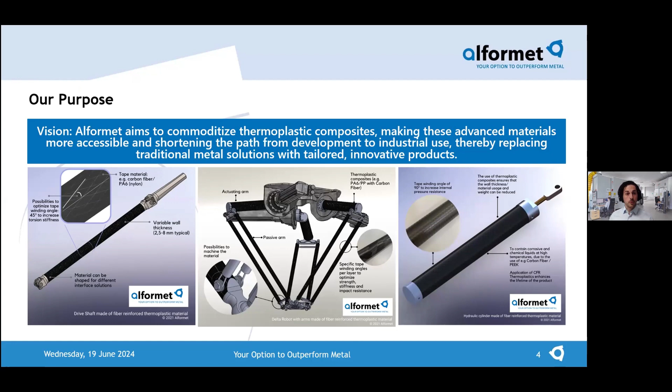As Thomas mentioned, what Alformet is there for is to lower the bar of entry for thermoplastic composite tubular products. So we want to commoditize these materials to make them more accessible, shorten the path from development, and then replace traditional solutions. Alformet stands for Alternative for Metal. This is something we do with our business model. Alformet was designed from the ground up as a company who uses the machines from AFPT, and everything about our business, from our inventory, our supplier relationships, our process flows, our ERP system, our company culture, is designed around the production of these thermoplastic components. So when someone comes in with something they want to have, then we help them design it, they order it, we manufacture it and deliver it.

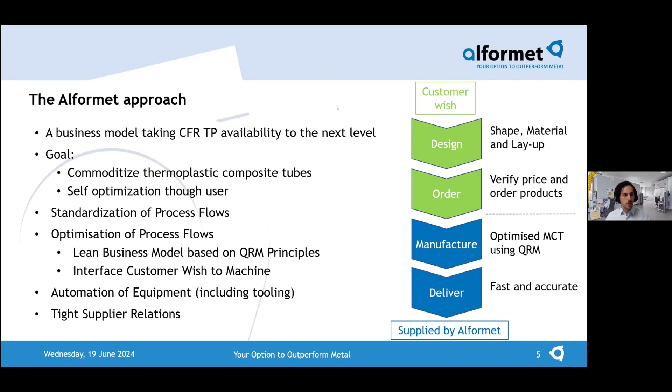There's two sides of that business. For one side, there's the series production. That's when someone has a family of products that they always order the product numbers from us. And then there's the one-off production, and that's going to be our focus today. The one-off production is high mix, low volume production. That's when every product is different and the products probably aren't going to be repeated. And our goal here is to optimize this top part of the process flow.

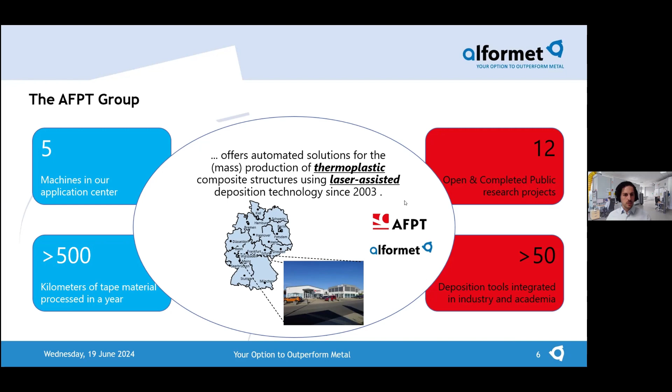So shortly about us, we're part of the AFPT group. And being so, as I've already mentioned, we use AFPT's machines and technologies. AFPT has been focused on thermoplastic production with a laser since 2003, so now over 20 years. We have 5 machines at our facility here at Alformet that allow us to process around about 500 kilometers of tape a year, and stay closely connected to AFPT and the current availabilities of functions on their machinery.

For those who don't know, really short, the laser-assisted tape winding process is a process that uses a laser as a heat source to melt the tape, both the incoming tape and the already laid substrate, in such a way that it's a closed loop control. It's melted completely when it gets to the nip point. Then when the roller goes over it, it's a fully consolidated composite. There's no need for any sort of post-processing. There's no need for harsh chemicals. There's no off-gassing. It happens in situ. It's quick, it's efficient, and allows for a scalable, high-quality production.

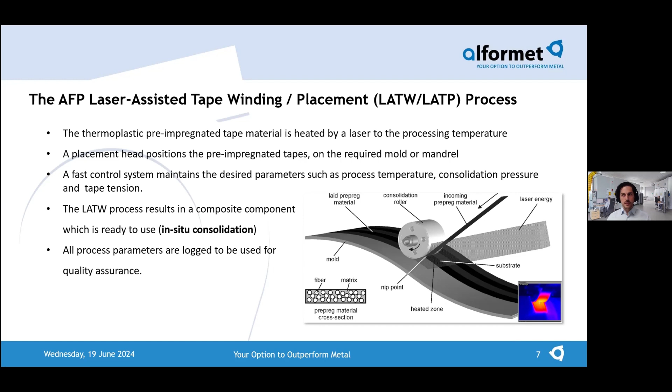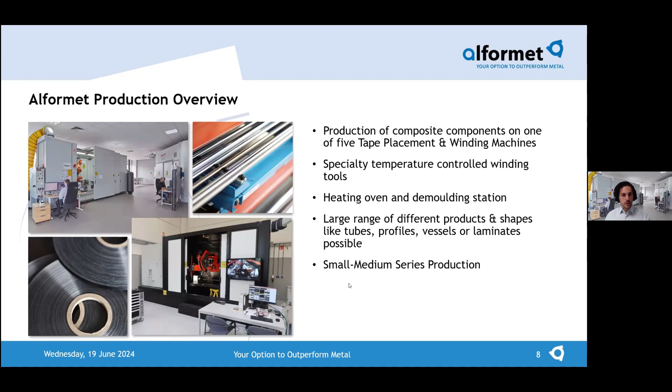At our facility, we have our machines. We have specialty temperature-controlled winding and placement equipment. We have several ovens and demolding stations, ranges of products that we could do. I'd be happy to let someone know more when they want to know, and we can achieve small to medium series size production at our facility currently.

Primary product focus is thin-walled inserts, thick-walled structures, pressure vessels, and functionalized tubes. Those are the four categories I like to separate them on. The thin-walled inserts are things like rotor sleeves, localized reinforced inserts for injection molding processes, preforms for other post-forming processes. And then on the other side, we have the thick-walled structures, which are for rocket structures, for seals, for bearings. Those are our two bread and butter businesses.

They're complete polar opposites. The one side is very high automation and low production times. On the other side is very long production times and very low automation. The pressure vessel is something I'm not going to focus on right now, but that's also a very hot topic with the hydrogen economy.

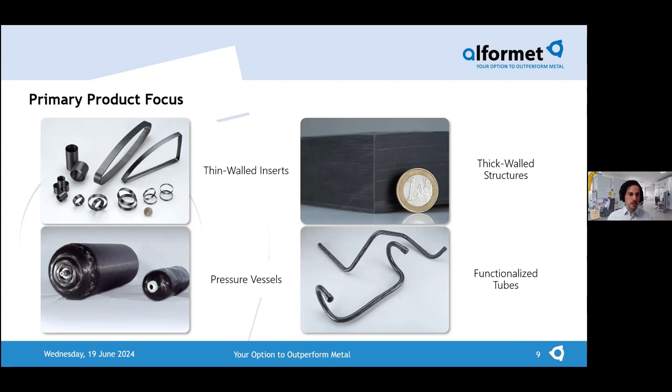And functionalized tubes is also a very exciting topic, but not the focus of what we have here. That's taking advantage of the full abilities of thermoplastic composites, being able to reform them, to bend them, to overmold them, and functionalize them into integration to other structures. The focus today is going to be specifically tubes, standard tubes that are straight, that have a defined laminate structure, that are tailored to the needs, and are made in the volumes and sizes that are necessary.

In production planning, we have our own internal system and software that we programmed and use ourselves. That way, when we get an order, we are able to, with very few variables, give those into our system, which has the intelligence of what we know about how the different materials function in different conditions, being different diameters or angles of the mandrels, and then the different tooling that we have with the different abilities that they have.

That on top with knowing our machines, knowing the geometry of our machines, and knowing the control system of our machines, by putting in a few variables, the software that we have automatically prepares a production for us. That automatically gives us the robot programs to be put on the machines. That gives us the production documentation and allows, with very few clicks and basic information, to set up a production so it could either go directly to the machine or go to an operator to be entered into a machine.

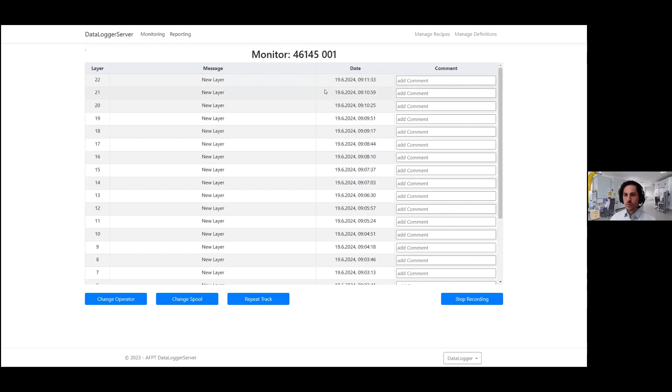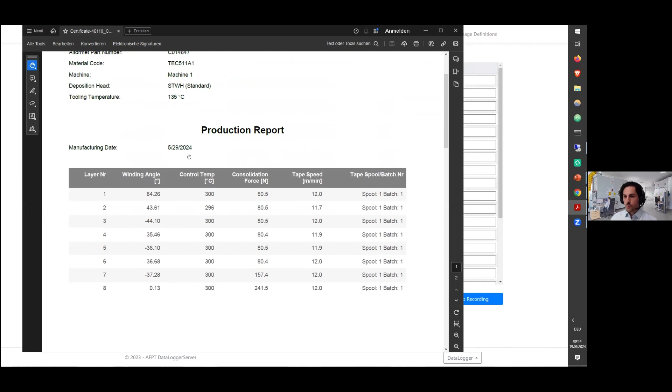And then after the production, you generate such a certificate to show the customer exactly what happened on every layer, with what angles, what temperature, what speed, what force, and then a statement of compliance for the limits that we use to check this, plus then standard information to your order.

So switching back to the presentation, Thomas, let me know if something didn't work on the switch. Yes, that's what we have.

And so that's on what happens during the process. That's what happens after the part is produced. Then you get a certificate out of the production. And then, of course, there's the post-production. We could use also the data from the machines to do preparation for post-processing of machining, or anything to improve the product in a certain way, either with surface or something specifically for finishings. And then there's also the diagnostics.

So during the process, everything is recorded, everything is logged, everything is saved, and that could be used for very intense diagnostics, such as what we use with the partner in our joint venture, Digital Composite Factory. The company New Frontier Technologies could, for example, use these diagnostics post-process to feed back into the machine and improve the quality of the product as we go along.

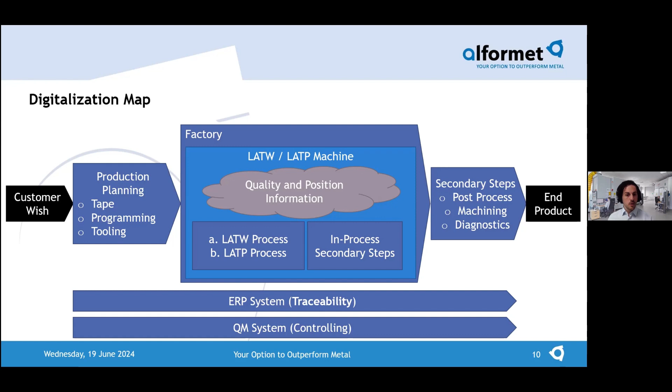So, as mentioned a couple of times, the point of today is making the start of the process easier, reducing the time from, hey, that sounds like something interesting I want to try, to here's something on my table that I could get an impression of, or at least test it directly. I decided to present that in a flow.

When a typical sales order comes in, or a request for a product, there's a couple steps that need to happen. So even just between this first interface between customer and the engineer, a request comes in per email. Someone says, I'm interested. I would like to learn more. And I'll say, okay, thank you for writing to us. I would love to talk to you. Let's set up a meeting next week.

No, next week's not good. Let's try for the week after. Okay, we'll do the week after. Good. Then we have a meeting. We discuss the necessities of your applications. We discuss the design criteria for the process, talk a little bit about what needs to be considered. And then they say, great, I would like a quotation. Good. Then it comes into the pile of quotations that need to be processed. Might take some time depending on how capacities are.

Then after that, a quotation is sent. And then the questions start coming: oh, what if we change this? I want one more of those. I want an additional layer. What happens if we change the angle? Yes, good. Okay, recalculate. Here's the additional quotation. Good, then it needs to go into our processing, get ordered. Good, it's ordered. Goes to the machines, gets sent. Maybe from start to finish, 4 months go by before the first product is on the table and we have a way to talk about it. And then what happens in between as well.

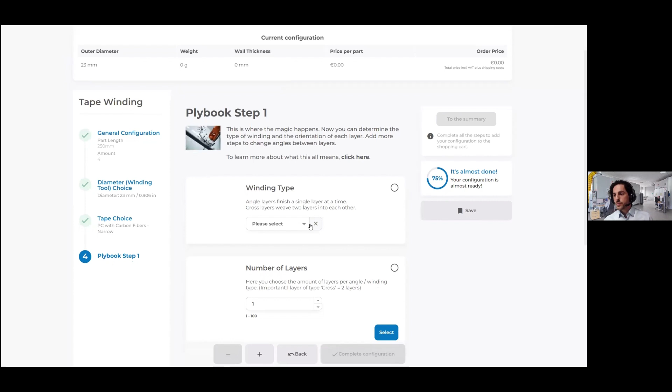In our process, there's two basic winding types. We call them angle winding and cross winding. There's a short explanation here, and there's documentation that's not finished. That's why the link's not there, but it's being prepared, where then here's the link, and you could find out more information about what it means to choose one or the other. There's quality considerations, there's costing considerations, there's productivity considerations, things that'll be explained to you. That way you can then make the decision yourself.

Here I'll say I want to have one angle layer of 89 degrees. And what that does is it shows me directly the effective layer that comes out of the process. That gets back to another important thing that someone needs to know about thermoplastic tape winding. We lay the tapes over a mandrel in such a way that a layer is completely closed. That means depending on the diameter of the tube and on the width of the tape, there's only certain angles that are possible. Not every single angle is possible. And here you could see the effective angle that comes out of the process based on the desired angle that you would like to have.

So I just define one layer. As you see, the price starts forming. It seems quite expensive for one layer, but here is where you can see how much of the price is going into the basics and the setup and the secondary time, how much price is for the part, how much price is the material. These are things that we could play with here, because it all updates live at the top of the page with the information about the diameter, the weight, the thickness, then the price per part and the total order price based on the number of parts that we've selected.

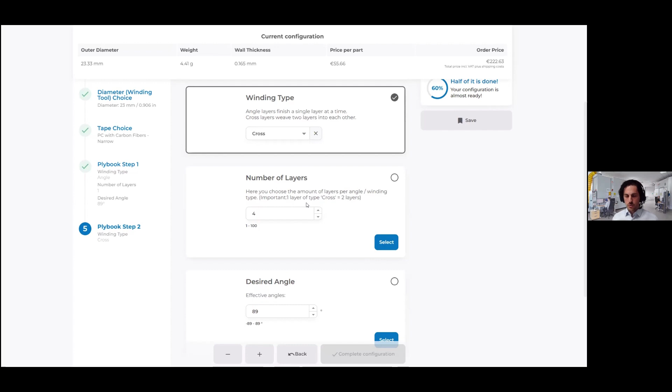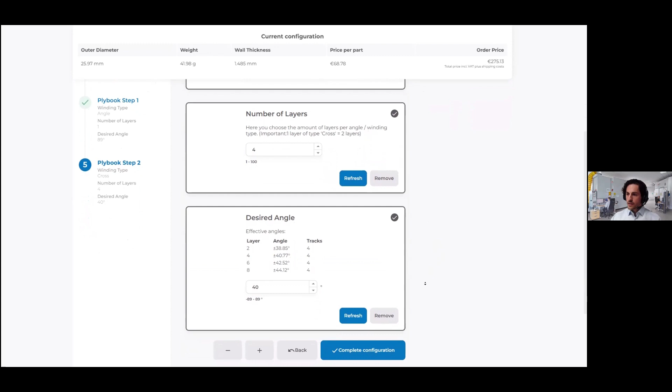So going through this process, I would like to have some cross layers, I'll say four layers here. Here I note that cross layers are always a combination of two layers, because cross layers weave two layers into one. So four layers in this case means eight layers below. Four cross layers means eight layers, and I would like to have that with 40 degrees. I select that, and I see the actual angles that come out of the process again. So this can be played with back and forth. We could watch the price update, and we could also see how we optimize.

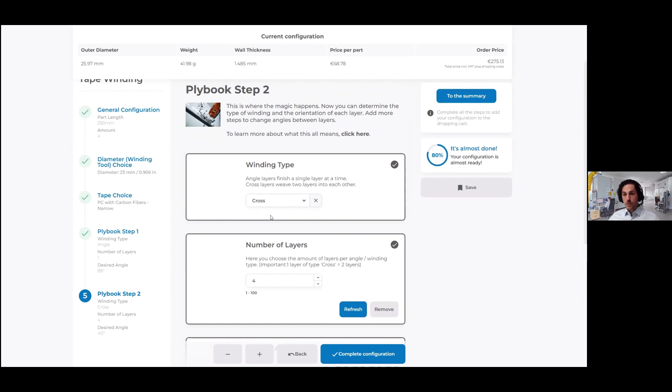So if I want to get more out of a production, because when the part is much shorter than the mandrel, the more parts that fit on the mandrel, the more the price comes down. So I can click right back and change this to 8 parts, refresh. The price per part was 68, and I put in 8, and it comes down to 43, and so forth. And the same if I lower the length per part, then obviously the price per part goes down. If I increase it to a certain point, it might tell me that doesn't fit on the mandrel. Those things also come into play.

I could say, no, I want 1.5 meters, and it starts updating. Now it gets much more expensive, because there's fewer parts that could fit on the mandrel per winding. That's why the price per part shot up at this point. So we'll go back to that. And I could also show you how the different diameters affect this mix here. So you could choose a larger diameter. I'll go for 110.

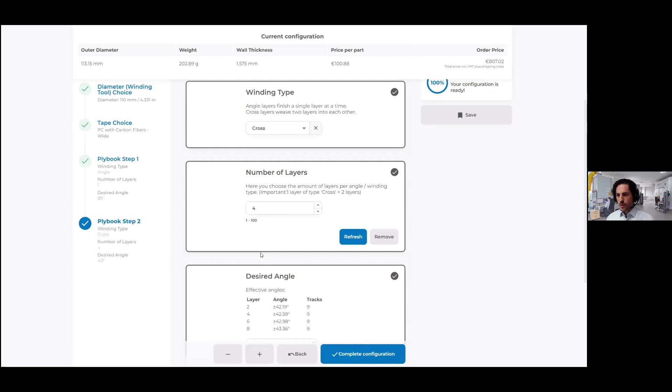And then we could see here the wide tapes and the narrow tapes are both available. So here's a narrow tape. It's 109 per part. I choose a wide tape in this scenario. It's a little bit more cost effective. How much the tape and the width of the tape actually impact the final price of the part is once again very dependent on how many layers we're actually putting into this part. And here you could continue adding steps as far as you want to go. I could add another step for another 15 layers of angle winding, and it goes on, going back and forth to design exactly what it is that you want to have in your part.

And this is this constant feedback, which has always been missing for the potential consumers of this technology, where they need to be discussing with someone who is an expert on this, who can both advise on the financial aspects of it, as well as advise on the engineering aspects of it.

And this technology itself, so thermoplastic composites themselves aren't widely used. The technology of laser-assisted tape winding is also relatively young. There isn't a general understanding in the zeitgeist of the market how exactly this works. And that's what we want to provide. We want to provide a way that not only provides easy access to this material, but also education on how it works, why it works, and how you best optimize it for yourself, your application, and your company.

And obviously, these are not volume prices. These are not going to be something that you could expect for 1,000, 100,000 parts. It's not even possible to order here. We're talking in the range of maximum 50 parts currently.

And what that means is that also the tape prices and the tape availability, these are also not the most optimum prices, but it allows an easy way to get access to it, to try it out, to validate for the application, and more quickly, when it comes to it, move to a state where you could be ready to either order more variants and try different things out, or get closer and closer to that series application where you could then be ordering in large volumes, have the potential, have the prices. This is shortening the loop, closing the circle, making all of our lives easier.

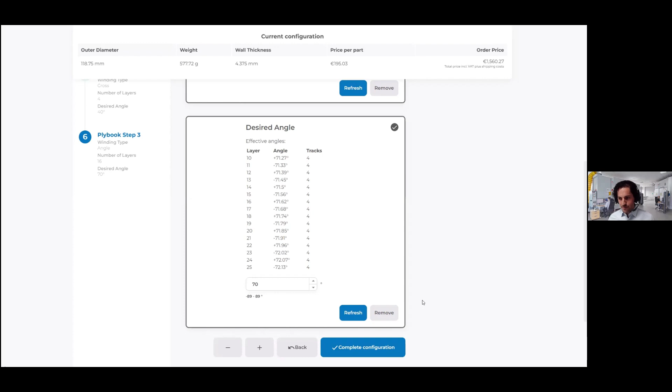So obviously then when it's finished, click on complete configuration. You see a short summary of what your price per order is, everything you've chosen here. Go to your summary, you put it in the cart, you go to checkout, you order it, you have it in a few short weeks.

So for me, that is the core of what I want to get to here. I wanted to show you who we are as a company, what we do, where our core capacities are, and where our value is. Our value is we have an incredible amount of knowledge. We have quite an amount of capacity on our machines.

We have very good relationships to suppliers of not only the mandrels, but also the tapes that we have, a consistent stock that's been built over time, as well as channels to quickly acquire more things that are necessary to more quickly get you what you need to try it out and get something on the table to feel it, say, okay, that's what it looks like. That's what it feels like. That's how it's going to work in my application.

The next step of that is then the digitalization. We have now the potential to give the configuration abilities directly into the hands of the customer. There's obviously those buttons to reach out to us if something's not clear or something needs to be explained in more detail. And there's also, for example, a save button on the page where you get an email link of the thing that you have configured. You could then forward that link directly to us and say, hey, I'm having problems. Can you help me? We could adjust it for you and then send a link back for you to proof it, order it, and move forward.

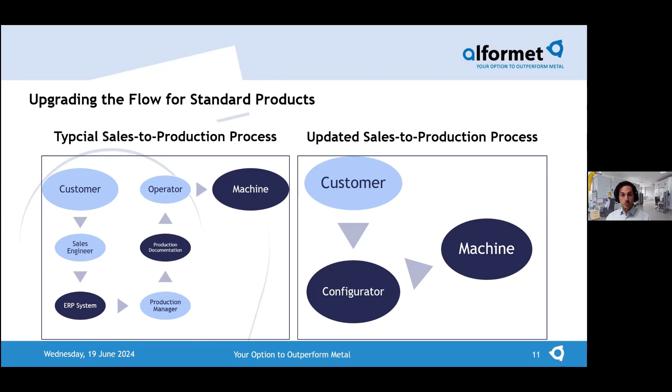I hope you've enjoyed this presentation itself. I hope you use our system when it goes live. Like I said, stay tuned and look out for it. And honestly, I would like to then do less talking, open the floor for more questions, and discuss any feelings you may have, as well as give you the potential to help form the future with us. When you have input, let us know. When you see that information is missing, or something seems unclear, say something. Obviously, we do this every day, so it's easy for us to overlook something. Reach out to me, let me know. I'd be happy to implement your opinions.

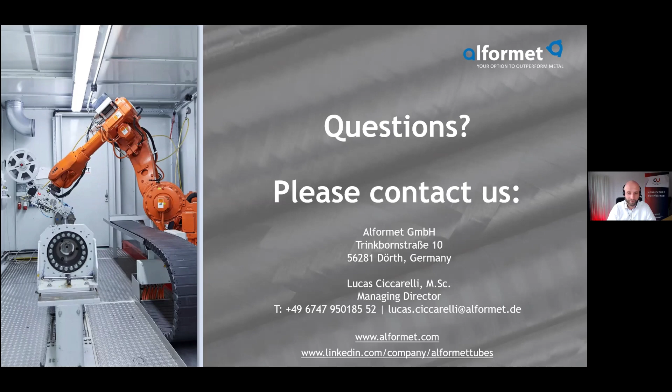Okay, thank you very much, Lucas Ciccarelli, for this nice introduction and the technology shown, and especially how you make the technology easily accessible for us, and much easier than before. Because for me, I like clicking through configurators, and seeing what happens and what they are doing. Okay, thank you very much.